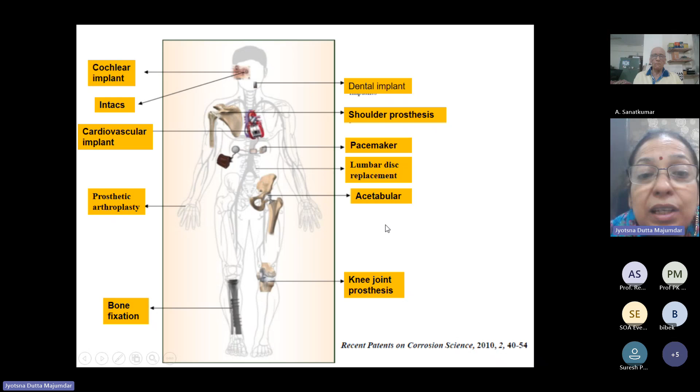Now, if you talk about the classification of bioimplants, bioimplant materials may be classified into 4 different categories: biotolerant, bioinert, bioactive, biodegradable. This is for beginners, so this is a very important and very basic classification.

Biotolerant materials are those materials which are not adverse to the human body, but whenever you implant it in the human body, there is fibrous tissue growth and they just remain like that. Bioinert materials similarly don't cause any adverse or toxicity effect on the human body, and there is cell adherence and growth with time.

Bioactive materials are important materials which basically promote cell growth and subsequently tissue growth to a very large and nice extent. Biodegradable materials are those materials which degrade within the human body, and the cell grows as it degrades, so it remains in the body but doesn't cause any toxic effect. It gradually degrades, and tissue and cell growth replaces it. So implants are basically replaced by tissues.

Magnesium is a very nice biodegradable material for implant applications. Gold is biotolerant, porous structure of hydroxyapatite is highly bioactive in nature. Similarly, plasma sprayed hydroxyapatite, zirconia is also bioinert in nature. Different metallic implants are bioinert in nature.

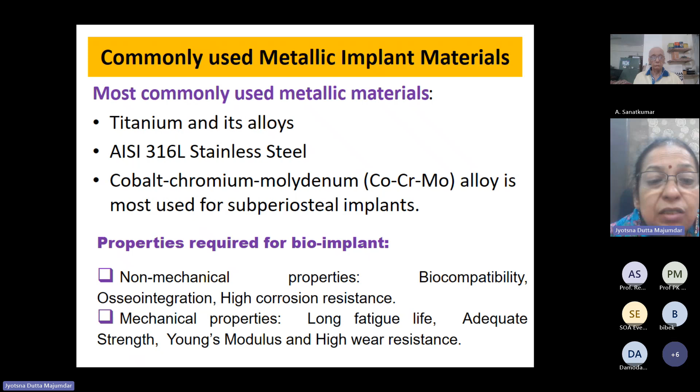The requirement for why these metallic materials are used as bioimplants is because of their biocompatibility, good osseointegration property, and comparatively higher corrosion resistance than other metallic materials available in nature. They also have good fatigue property, adequate strength, good Young's modulus, and high wear resistance property. So these are the advantages and disadvantages as stated here.

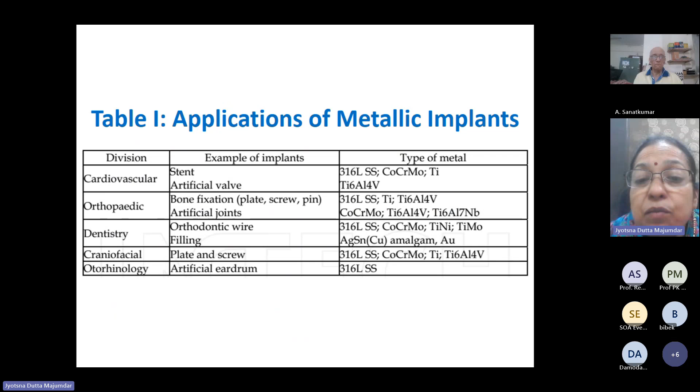Whenever you talk about applications of this metallic implant, they are mostly applied for heart tissue replacements like cardiovascular devices, and orthopedic devices like bone fixation, artificial joints, then dentistry, craniofacial plates and screws, otorhinology, artificial eardrum. So these are the different places where metallic implants are applied.

If you compare their properties, they also have gradation, in that you cannot use all metallic materials in a similar fashion as implants. If you compare 316L stainless steel to titanium, you'll see titanium is more expensive than Ti6Al4V, which is more expensive than AISI 316L stainless steel. But AISI 316L stainless steel has higher Young's modulus, and hence there is a problem of stress shielding which is not there in titanium.

Similarly, if you talk about minimization of stress shielding, your choice should be magnesium, but magnesium has a very poor corrosion resistance property. So whenever they are used in the human body, there is a lot of hydrogen evolution, so those problems are there. If you talk about corrosion resistance property, titanium is best, then 316L stainless steel, then magnesium and its alloys.

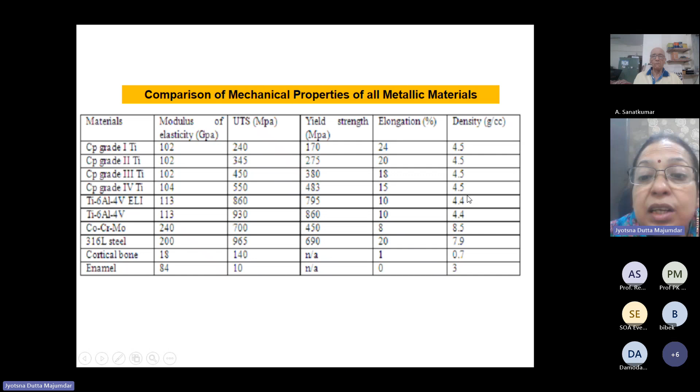But on the other hand, if you talk about strength and percentage elongation, titanium and steel are of the similar category, they perform at the same level. However, if you talk about density, it is much higher for steel and cobalt-chromium-molybdenum alloy as compared to titanium and its alloys.

These are the different applications: joint replacement parts, bone fixation materials like nails, screws, nuts, plates, housing devices for pacemakers and artificial heart valves, surgical instruments and components, dental implants, and healthcare goods like wheelchairs and artificial limbs. Earlier, artificial legs used to be fabricated from ceramic materials, but now metallic materials are coming into the market.

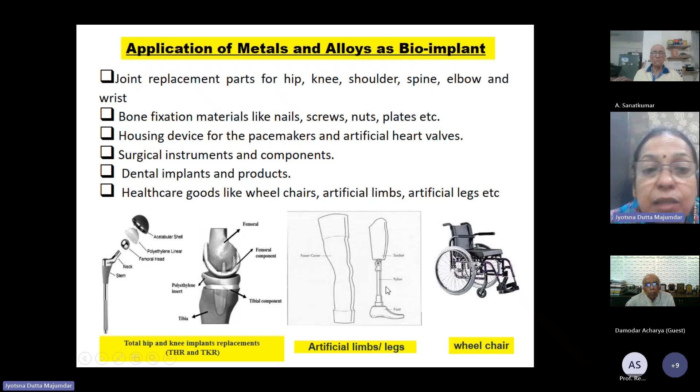For this particular application, even though it's very popular as implant material, it has been observed that metallic implants often undergo premature failure. You design the implant material for a certain period of time, but it basically fails even before its designed lifetime.

So what are the reasons? The reasons are wear, corrosion and inflammation, fibrous encapsulation, low fracture toughness, low fatigue strength, mechanical failure, and mismatch in the modulus of elasticity between the bone and implant, leading to stress shielding effect. As a result, there is shielding of stress surrounding the implant material, leading to damage of the surrounding cells, so that the cells cannot survive.

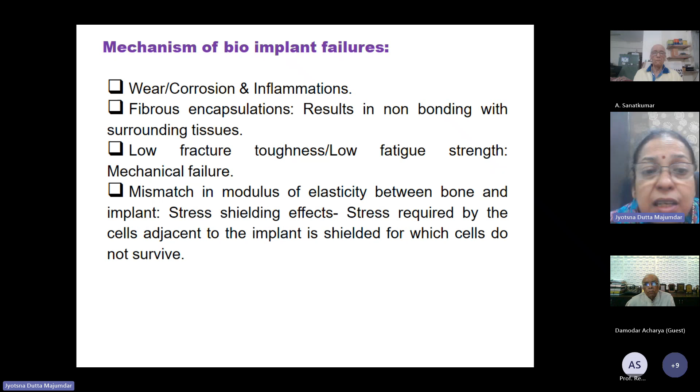Particularly, the biggest problem is film formation, biofilm formation, or biofouling corrosion, you can say. There is a very fine, thin film formation consisting of biological materials surrounding the implant material. In addition, there is typical crevice corrosion as well as tribocorrosion phenomena due to constant chewing action during processing.

You cannot keep yourself at rest after implantation. At least after 4 or 5 days you have to go on with your own activity. So if the chewing action is more, you will find there would be more problem of tribocorrosion, and there is also occlusal overload.

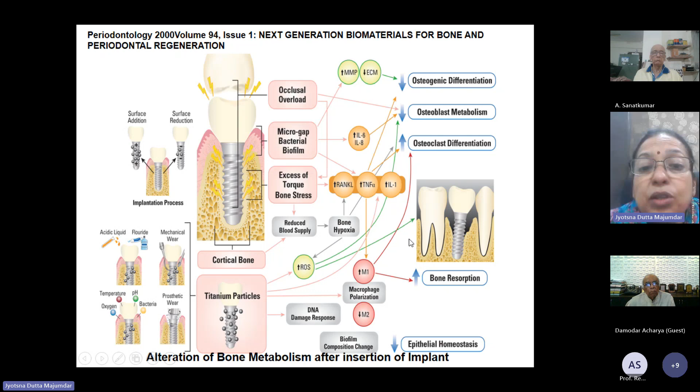Subsequently, because of this tribocorrosion and corrosion phenomena, very fine titanium particles gradually come out and spread throughout the tissues of the human body, causing inflammation and allergic reactions. These problems are always there in the human body after implantation, even after 5 to 6 years of the implant.

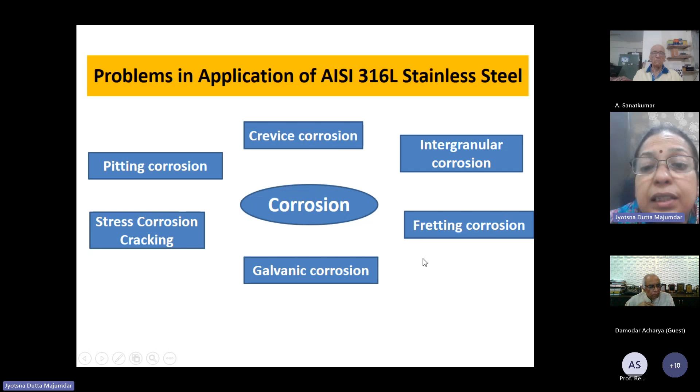Different forms of corrosion occur depending on the environment and the situation. The corrosion mode changes from one to another, and each individual mode has its own kinetics. It is very much dependent on the pH of the environment, the kind of load the implant is experiencing, and the kind of motion or movement there is. So everything plays an important role.

It is very difficult to simulate the actual situation, but it has mostly been observed that fretting corrosion is the predominant mode of corrosion, in addition to tribocorrosion in fretting mode, which causes the maximum problem associated with dental implants. But if you talk about hip and femoral prostheses and knee joints, in addition to corrosion, fatigue problem is also there, which causes degradation or premature failure of the implants.

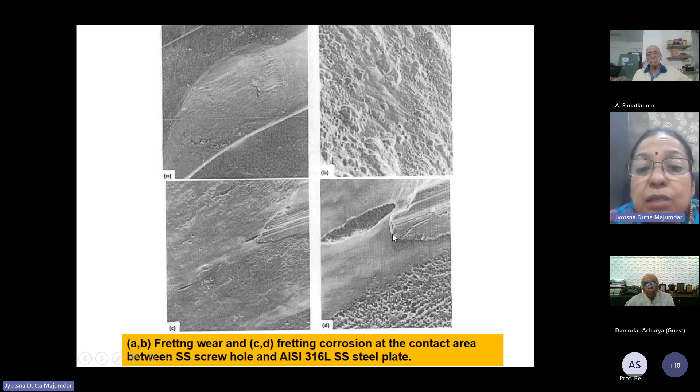This is fretting corrosion, the fretting wear and fretting corrosion at the contact area of the stainless steel screw hole and AISI 316L plate. This is the fretting wear part. Whenever there is fretting wear, there is a discontinuous removal of material from the surface, with band formation because of the loading action. If you talk about fretting corrosion, you see a similar situation but with dissolution of material from the surface, and heavy fretting corrosion as well.

So these are typical. This is also another interesting area where a lot of work needs to be conducted, because we are trying to gather information on the mechanism of failure of implants, which is not available in detail in any handbook, because of the problem of getting failed implants.

Whenever I talk to the hospital, they said whenever it fails, they basically don't consider it, they throw it away. There is no scope of keeping it, because whenever the patient reports, there is always a kind of conflict. They try to scold the patient, saying the patient didn't take extra care, that's why the implant failed. But failure might also occur because of a materials problem, and they are not so aware of the materials, because those are outsourced. They don't develop it on their own, hospital doctors have no idea about the kind of materials they are using, because they just place the order and get the implant.

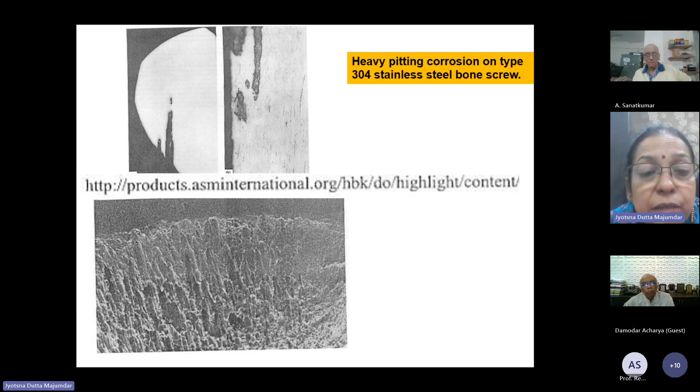So they had no idea there could be failure because of material. Now we are trying to do a small and big project in collaboration with a hospital in Bhopal, where we will try to gather failed implants and see the reasons for failure of many implants for different applications. If you look at these failures, you'll find most are because of either fatigue failure, or fretting, or combinations of fretting and corrosion, or corrosion and wear.

These are a few reasons for the premature failure of implant material. These failures may be overcome by typical designing of the surface. Another problem associated with the implant is scar formation at the interface.

Particularly when you talk about pure metal without doing any bioactive coating, if you insert it in a human body, the typical mechanism of cell or tissue growth is by mechanical anchoring. So if the surface is not properly prepared or sensitized, the cells don't grow properly, and as a result there is fibrous tissue growth on the surface, which is not good for health. At the interface between the implant and the tissue, there is cancerous cell growth, which is not really good for health in the long run.

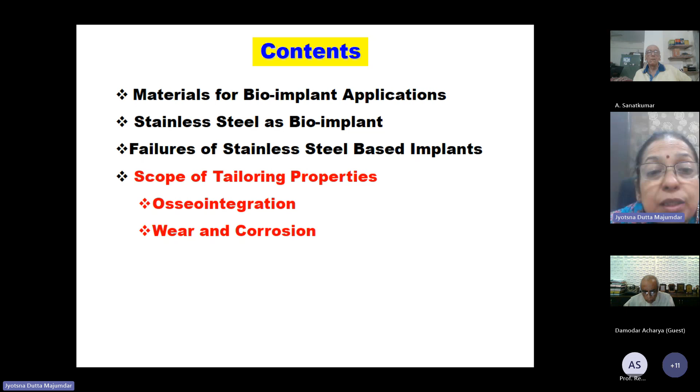The second problem we are trying to solve is the wear and corrosion problem. These are very important problems which need to be addressed. In all cases we use the typical stainless steel based implant. Initially we develop the coating, check feasibility, and optimize parameters for coating development on coupons, then check the feasibility of applying that coating on implants available in the market. This typical diagram shows that in materials processing, processing, structure and properties are very much dependent on each other, and they dictate the performance of any component.

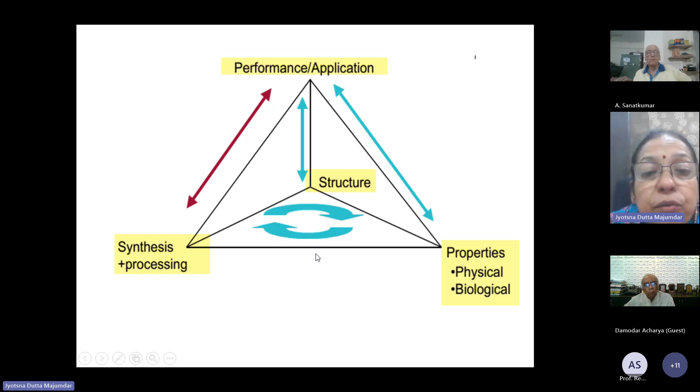Structure is influenced by the processing route followed, and subsequently the properties achieved. So structure-property correlation is a very important theme of the research of the group. We fabricate by different ways and observe the structure at different scales, and also evaluate the property. By correlating structure and property, we optimize process parameters, and under optimized parameters we try to understand the performance of the coated implant or coating.

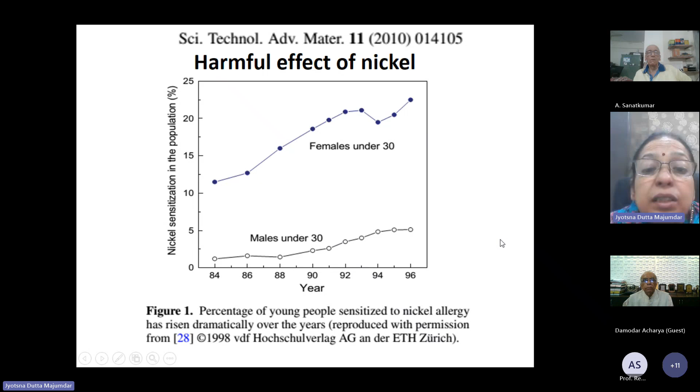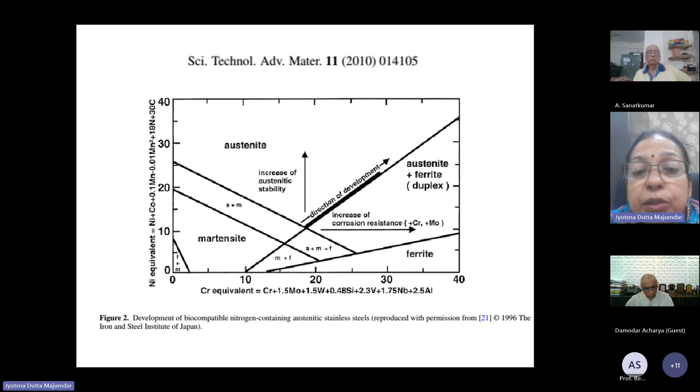So nickel equivalent is shown as a function of nitrogen, carbon, nickel, chromium, cobalt, manganese. As you increase nitrogen content, you get an effect similar to nickel, but without nickel. So you can cut the nickel content in steel, add more nitrogen, and have nitrogen-bearing steel with similar structure and properties, but free from nickel.

This is very important. There are a large number of nickel-free stainless steels coming into the market where the properties are similar, but they contain nitrogen. Nitrogen is usually purged during preparation of the steel, and during that process you can reduce the nickel content a little bit.

Some stainless steel implants for surgical applications have nitrogen content around 0.25 to 0.5, or 0.85 to 1.1%, depending on different grades. Normally in AISI 316L stainless steel there is 18% chromium, 8% nickel, and nickel content can go as high as 11 to 13%. But in nitrogen-containing steel, where nitrogen reaches up to 1 or 1.1%, you can reduce nickel content to around 0.5%. This is very good because you have much less nickel, so the probability of toxicity after implantation is minimized.

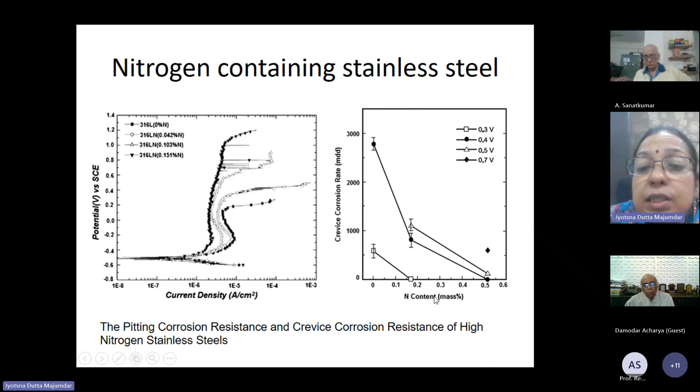So crevice corrosion property also, if you see, it is increased - that is, the crevice corrosion rate is decreased to a large extent at different voltages when you go on increasing the nitrogen content in the steel.

Similarly, if you see the abrasion corrosion, abrasive wear and tribocorrosion property, you will find that for the abrasive media in air and in sodium chloride solution, the relative wear value is significantly reduced in nitrogen containing steel.

Hardness is increased, and hardness after abrasion is also increased, and the relative wear value is significant. This steel is showing a higher value, but 316L and BIOSSN4 are having more or less similar values, or a little higher value.

I do not know, but since hardness is a little higher, it should offer higher abrasion wear as well as better tribocorrosion performance, but it's not showing so. Hardness after abrasion is increased, but the abrasive wear value is not really.

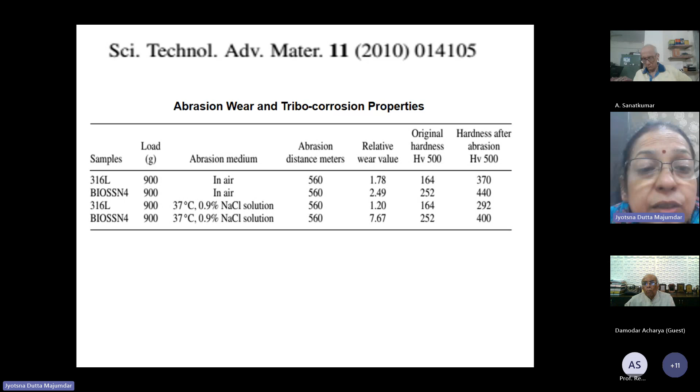So these are research results. Someone can always take the nitrogen containing steel and see the effect of this nitrogen on the tribocorrosion property in a more extensive fashion.

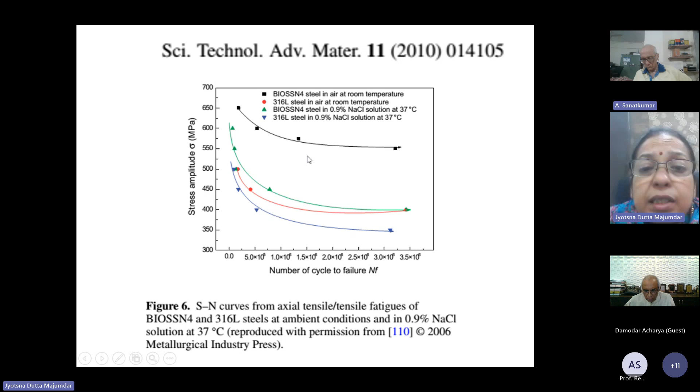If you talk about the SN curve for the nitrogen containing steel like BIOSSN4, you will find that fatigue property is also significantly higher in case of nitrogen containing steel than that without nitrogen content. So it improves fatigue corrosion resistance property to a large extent, it increases corrosion resistance to a large extent.

But as for tribocorrosion property, why it is showing a poor value, we have to - someone can repeat the result and check what is the reason behind it.

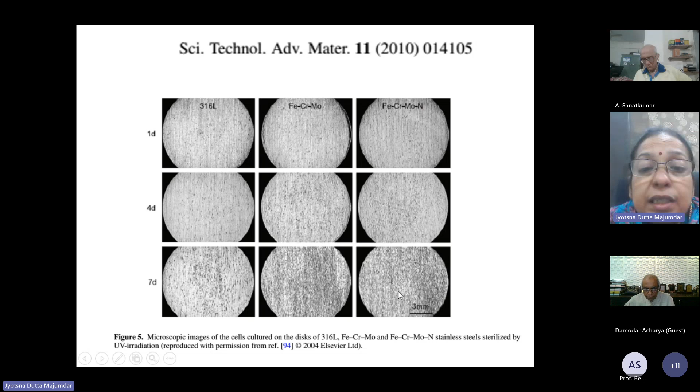So again, this is showing how the cell is growing after 7 days. It is not visible over here, but if you see the report, it is shown that for nitrogen containing steel, the cell viability and proliferation rate is higher than that of 316 stainless steel.

Now, if you talk about surface structuring and osseointegration, osseointegration can be achieved by two ways: number one is by development of bioactive coating, and number two is by roughening of the surface.

Another approach followed prior to implantation of the metallic implant is sand blasting. They do sand blasting, shot peening prior to application of the implant in the human body. When sandblasting is done, it causes a lot of rough sides on the implant surface, rough grooves on the implant surface.

When grooves are there, cells get anchored on the surface, because for all bioinert implant materials - particularly titanium based material or AISI316 stainless steel - the mechanism of cell adherence is because of mechanical anchorage, not really any spontaneous action.

So they do bioactivation of the surface by two ways: the first way is by mechanical roughening, and the second way is by application of bioactive coating.

If you talk about coating, there are so many different varieties of coating techniques available. While applying some coating material, you have to choose the proper coating technique - that's very important. So in the next few slides, I would like to show the effect of plasma spray deposition.

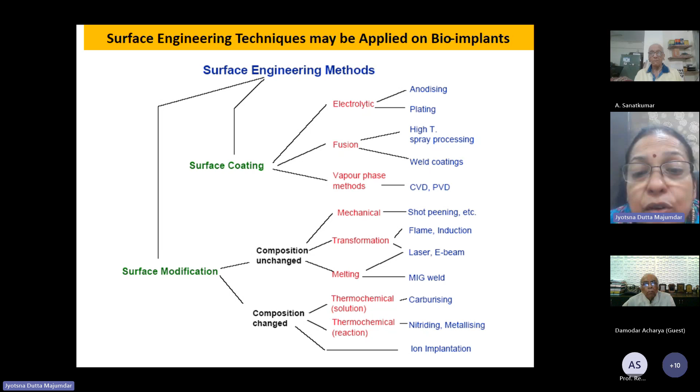Of this hydroxyapatite coating on the surface of the implant, and also we will try to show the effect of replacing sand blasting with laser surface texturing for improving the bioactivity of titanium based implant. So, as I mentioned, bioactive coating on Ti6Al4V for improved osseointegration, where we used two different types of materials.

Hydroxyapatite is a very common material, which is basically applied on the surface by dip coating or by sol-gel coating, but we used plasma spraying technique for development of hydroxyapatite - a little bit modified hydroxyapatite, because hydroxyapatite is very soft in nature.

It gets dissolved to a very large extent. Dissolution rate of hydroxyapatite within human body fluid is very high. In addition to that, the wear rate of hydroxyapatite is also very high - it is very soft in nature.

So we tried to modify the coating by addition of titanium dioxide and zirconia. Instead of pure hydroxyapatite, we developed the composite coating having 50% TiO2 and 10% ZrO2. Obviously, TiO2 and ZrO2 were reported to improve the strength, but dissolution kinetics were not reported properly.

So we developed these two coatings in addition to 100% hydroxyapatite, which was a standard, by plasma spray deposition technique. We also did heat treatment operation just for crystallization, because whenever we did plasma spraying, it was typically an amorphous coating.

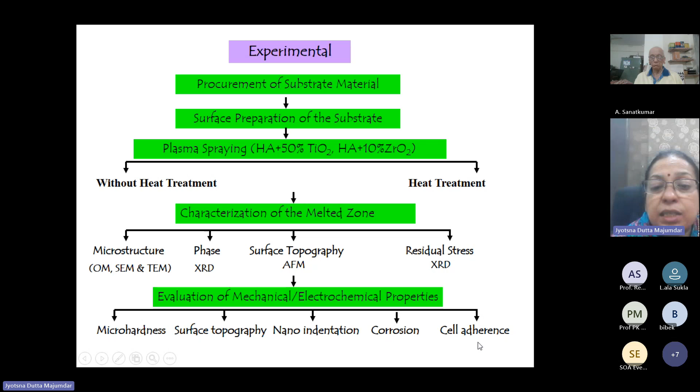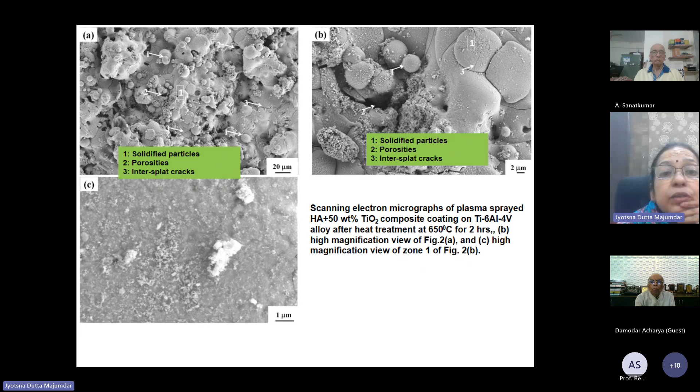This is plasma sprayed hydroxyapatite composite coating on Ti6Al4V after heat treatment. So after heat treatment we saw there was a little bit of crystallization of the coating, and we found there was also a little grain growth phenomena, and a stress relieving operation. So the coating was highly stressed before, but whenever we did the heating operation, the stress was completely relieved. That was one of the interesting features of that typical heat treatment operation.

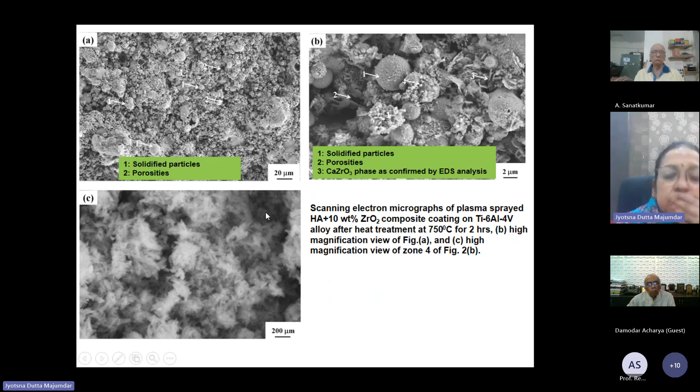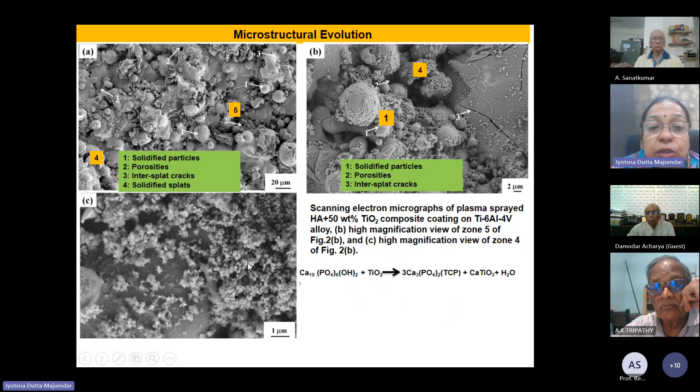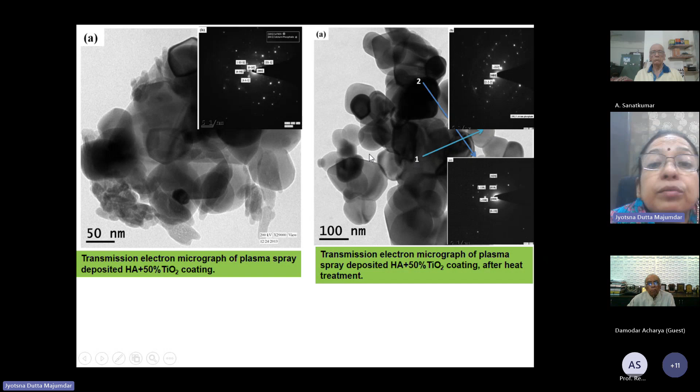This was confirmed by transmission electron microscopic observation. We see that there was presence of calcium zirconate and calcium titanate phases in the structure, which was confirmed by SAD mapping. Similarly, the calcium zirconate was also confirmed by TEM observation.

Now if you quickly go through the mechanical properties of the coating and corrosion resistance properties, you will find that due to addition of TiO2 and ZrO2 both, there was significant improvement in corrosion resistance, as well as the Young's modulus of the coating was reduced as compared to as Ti6Al4V.

But if you talk about the corrosion rate, it was again not really so high as Ti6Al4V because of higher dissolution rate of the hydroxyapatite. The pure hydroxyapatite results are not there when we compared it with pure as-received HA coating. We found that dissolution rate is decreased as compared to only HA because of the presence of TiO2 particles.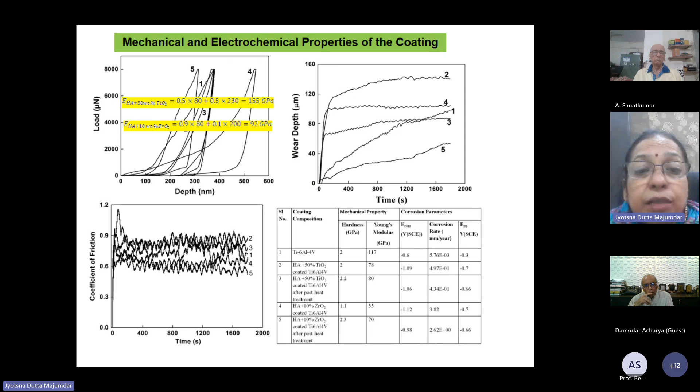So because of the hydroxyapatite coating, the corrosion rate or dissolution rate of the surface actually increases because of the higher dissolution rate of hydroxyapatite. So hydroxyapatite, though it offers bioactivity, doesn't really offer good corrosion resistance of the surface, though it is not really required because hydroxyapatite is bioactive in nature and doesn't cause any toxic effect in the human body.

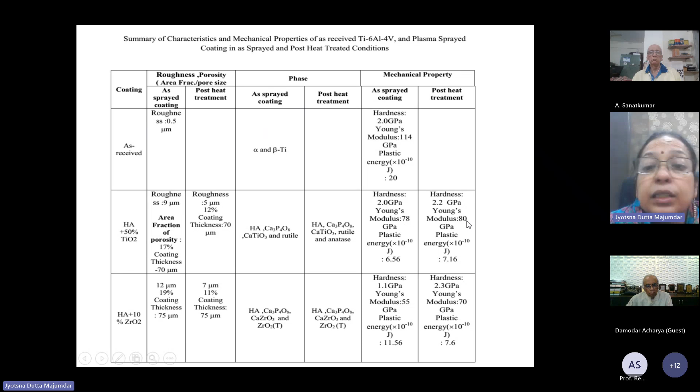So if you quickly go through the mechanical properties, we find that mechanical properties of the coating are lower than that of as-received Ti6Al4V in terms of Young's modulus and also plastic energy. But this Young's modulus reduction again is good, because on the surface the stress shielding effect is minimized.

So if you see the bioactivity behavior, we found that, being hydroxyapatite, certainly it is bioactive, and in comparison, because of addition of TiO2 and ZrO2 particles, there is not much deterioration in bioactivity. This is the surface microstructure which is shown over here.

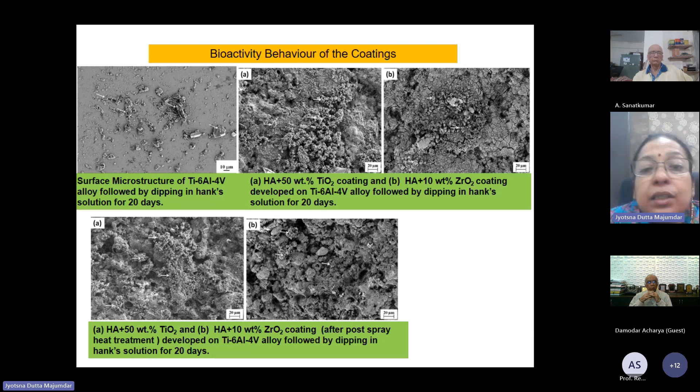But we actually determined it by weight gain, by weight change measurement. After each hour of dipping, we found the amount of weight change as a function of original weight. So partly there is weight loss because of dissolution, and weight gain is because of deposition.

So what we found is that the area fraction of deposition after dipping is 22% for Ti6Al4V. However, due to hydroxyapatite coating, it is 55%, and after heat treatment, there is a little bit reduction in the area fraction of apatite formation. So there is a little bit reduction in bioactivity, but these are all experimental results.

Bioactivity is a crude way of measuring the bioperformance of the material, so we have to go for in vivo analysis to know how it is anchored to the tissue, hard bone actually.

So now we also try to improve the osseointegration property by surface texturing. Usually, as I mentioned, people apply sand blasting, but whenever sand blasting is applied, there is random roughness on the surface, and that random roughness causes cell growth in a random fashion. So we try to observe the effect of periodic structuring or periodic roughening on the surface, and its effect on cell attachment.

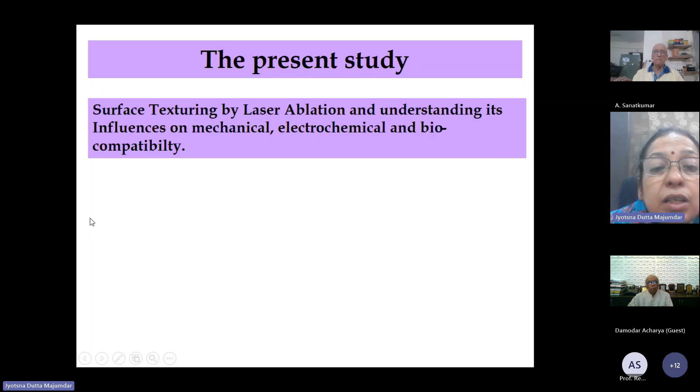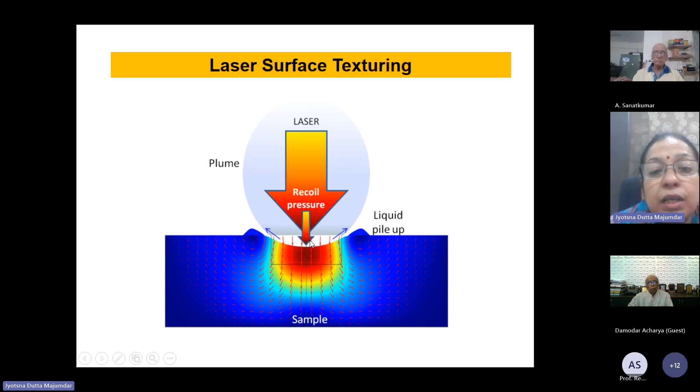So we use laser ablation technique. This process is called laser surface texturing to cause periodic structuring, where a high power nanosecond laser was employed on the surface to ablate the material, and subsequently rastered on the surface to cause texturing. We tried to develop two different types of texture: one is linear texture, another is circular texture.

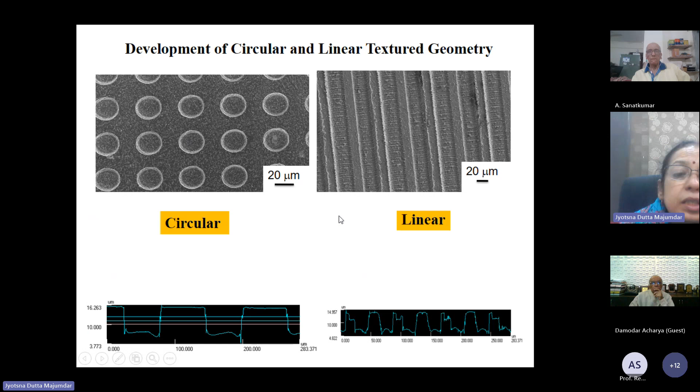In one kind of texture, we remove the material in a spot-by-spot fashion with a diameter of each groove of 20 microns. In the other case, it's in a linear fashion. In both cases we covered almost 50% of the area which was textured, and 50% was untextured. So this is a typical parameter.

We also changed the environment. In one case we used argon, in another oxygen, along with laser treatment, and in the third case nitrogen. Our standard was a sand blasted sample, which was done in order to understand the effect of periodic texturing or its added advantage over sand blasting.

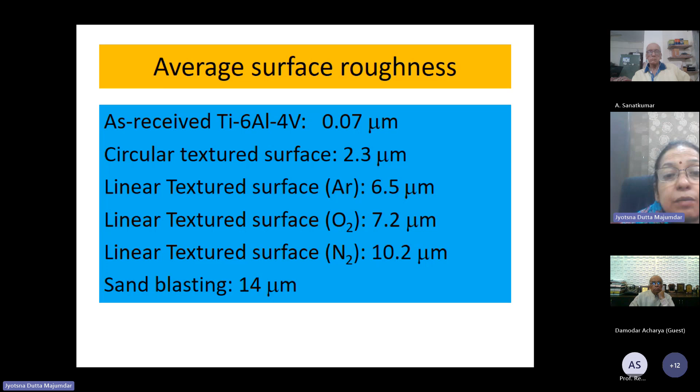Because titanium, as such, whenever it is implanted, there is spontaneous oxide formation on the surface. But that spontaneous oxide which forms on the surface is very loose and porous, so as a result it doesn't perform the way it should. So in order to improve the performance further, people use different surface oxidation techniques like anodization or surface high temperature oxidation processing.

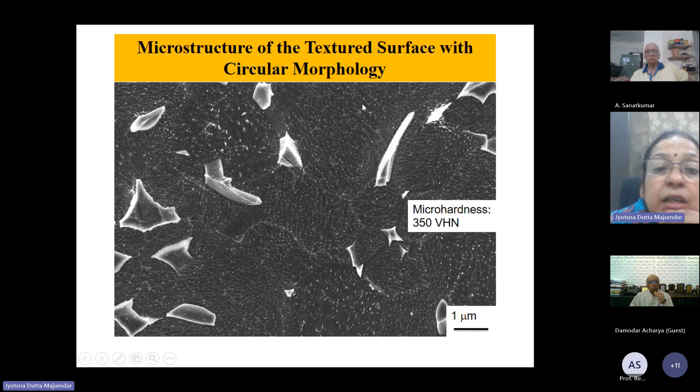So here while processing we had grain refinement as well as very fine oxide particle dispersion all throughout the surface. These are all beta phases. There was redistribution of the beta phases as such—during in the as-received Ti6Al4V, beta phases are present along grain boundaries, but when we melted it there was vanadium redistribution, so the beta phase was discontinuously present all throughout the surface.

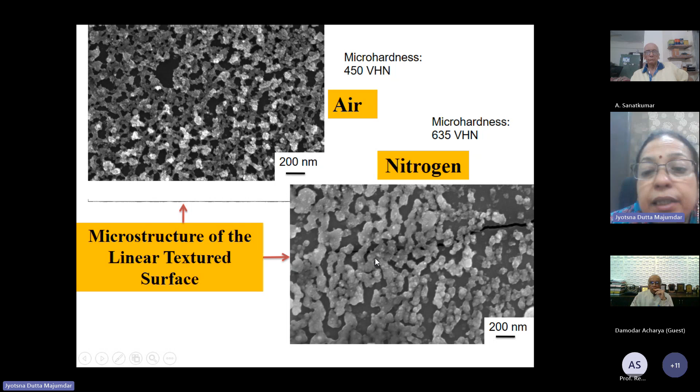When we melted in air and nitrogen environment, we found that oxide formation is there, but the surface is again partly oxides, partly metals, so oxide networks are there. Similarly, in the nitrogen environment when we melted, we had titanium nitride networks, and in addition to that, there is titanium alpha.

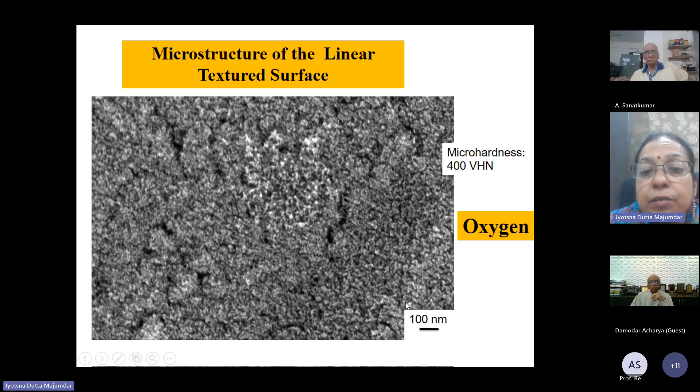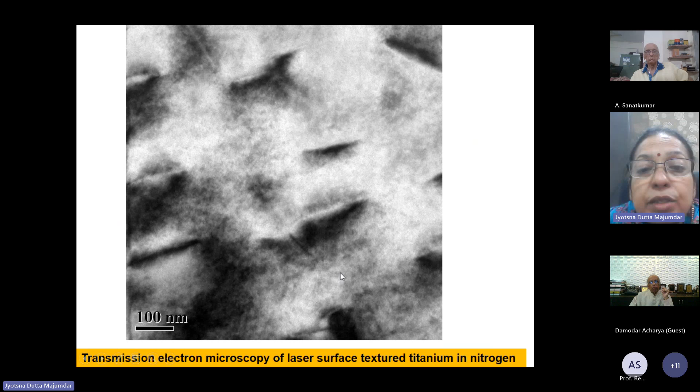In the linear textured surface, as I said, in the oxygen environment there was a very thin oxide film on the surface. We did this in three different environments: air, oxygen and nitrogen. Here we find patches of oxides present, in the form of very fine dots and precipitates, and in the nitrogen environment nitrides are also present all throughout the surface. In the oxygen environment we find a lot of oxides on the surface.

These are confirmed by TEM analysis, and we further reconfirmed the presence of these oxides by electron backscatter diffraction spectroscopy. This is typical phase mapping using EBSD analysis, where we show the presence of beta and alpha in the linear textured argon surface, in argon environment. If you see carefully you will find this is mostly alpha. Some amount of rutile is also present, oxides are also there, and Ti6O, another oxide phase, is present in a very small amount, and beta is present in a discontinuous fashion.

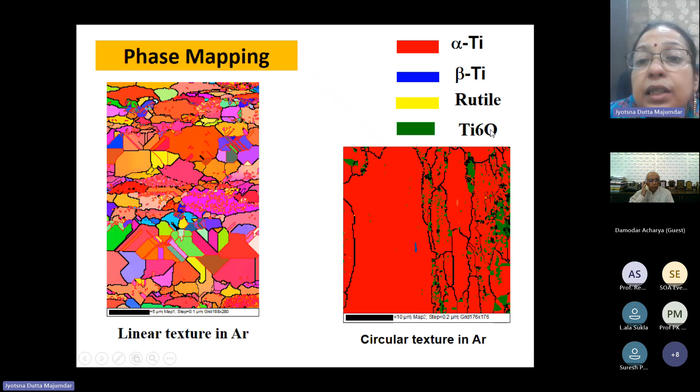A circular texture surface again. This is the texture surface we find when we look at the cross section. Here you see rutiles are very less, but this is mostly alpha and Ti6O phase formation. So phase stoichiometry varied with different samples. In argon and oxygen environment we see a lot of beta phase, mostly alpha, and some oxides are also there.

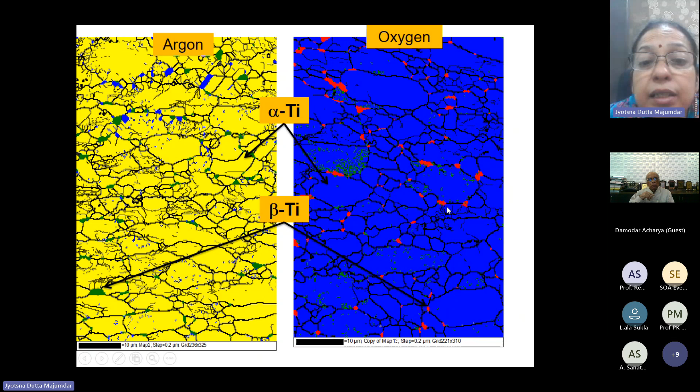Red particles are very small oxides present on the surface. In nitrogen environment there are a lot of nitrides, and alpha phase is also there.

So these are again a little bit of EBSD. We try to map the phase, but this is a relative measurement technique. We try to see, but it had to be confirmed by XRD analysis to know whether these phases are actually present.

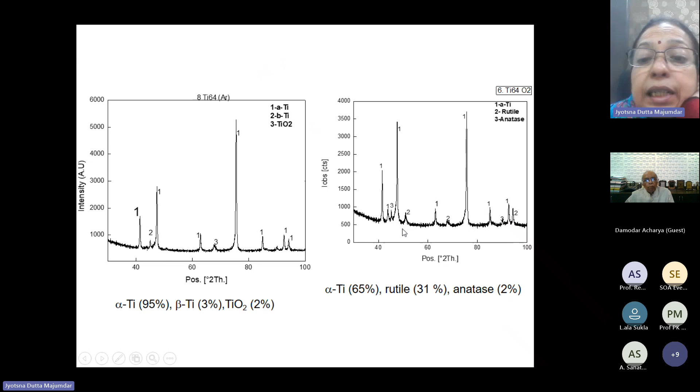When we did XRD analysis, we found that in the argon containing environment and oxygen containing environment, there are a lot of oxides on the surface. In nitrogen containing environment there are nitrides again. These are all typical analysis research results.

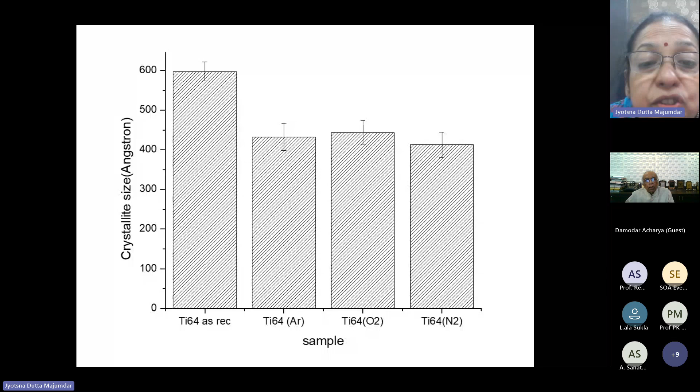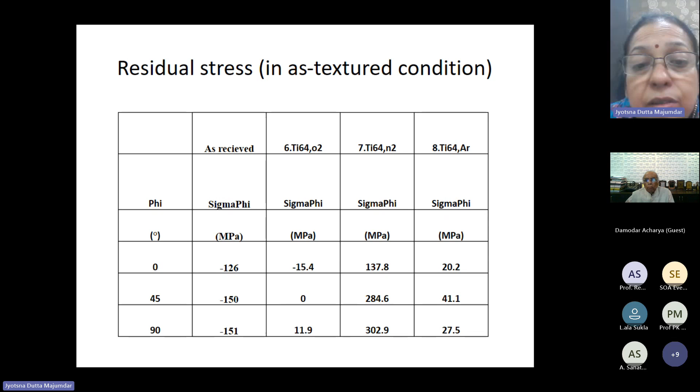But what is important here is that there was residual stress in the textured condition. There was also residual stress, but it was not significant, much lower than the acceptable limit. Whatever residual stress we observed was because these were irradiated using nanosecond laser, a very low pulse nanosecond laser, so it didn't cause any high residual stress to be introduced on the surface.

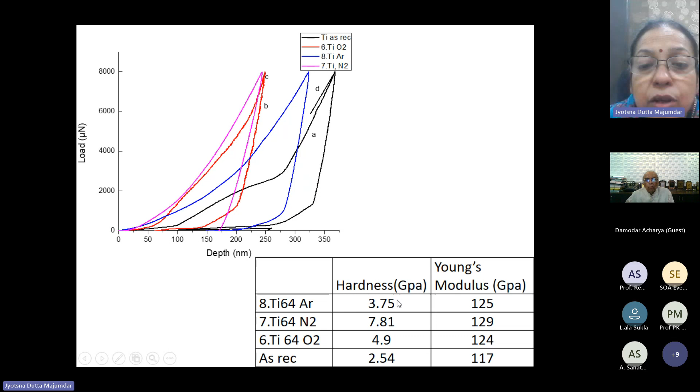The Young's modulus was significantly a little bit higher than the as-received surface because of presence of oxides, nitrides, and dissolved phases, and hardness was also improved to a large extent because of oxide and nitride phases on the surface. Due to these things, there is improvement of wear resistance property.

These are dry wear results, but this is not what we currently focus on. These are results which we observed long back. These days we are not doing any dry wear study.

We are trying to understand the performance of the coated material by tribocorrosion, where we are doing the same fretting wear in presence of the Hank's solution. We are getting more or less a similar trend to what we get in dry wear observed in wet wear as well. But obviously there is a corrosion effect also combined in wear, so that's very good information on how the materials behave in a real environment.

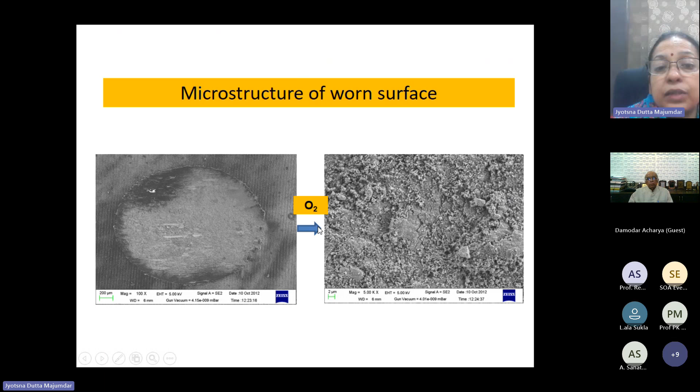We find that in nitrogen environment the wear volume is lower than that of the argon environment textured samples. If you see the microstructure of the worn surface, you see the typical characteristics of fretting wear observed here.

Interestingly, if we look at the corrosion rate due to texturing, it was observed that corrosion rate was significantly reduced on the textured surface, too much reduction in corrosion rate. But this reduction obviously is not only for the textured surface, since this corrosion study was done on a surface with a combination of both textured and non-textured regions, so possibly area corrections were not done.

Whatever average area we took, surface area in corrosion is very important, so area calculation is very important. But we just did the average area calculation, not the actual area, which is much higher than the average area whenever you do texturing. So whatever corrosion rate is observed is actually a kind of composite area. The first error is because this is not truly the textured surface's wear or corrosion value.

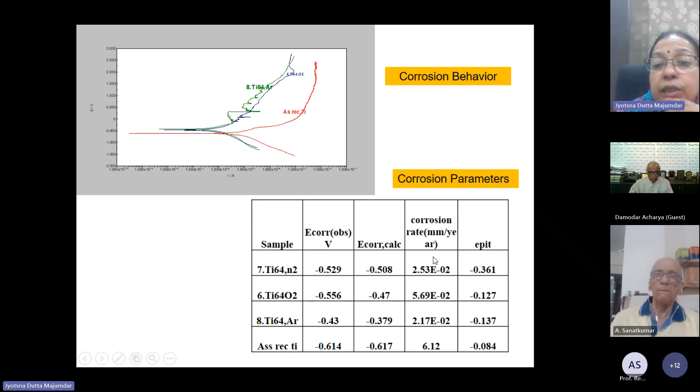This is a combination of textured and non-textured surface. The second problem is that while calculating the area, we just calculated the average area but not the actual area because of the presence of texturing. So these two corrections have to be made, then a little calculation done, to find out the true wear and corrosion rate of the textured surface.

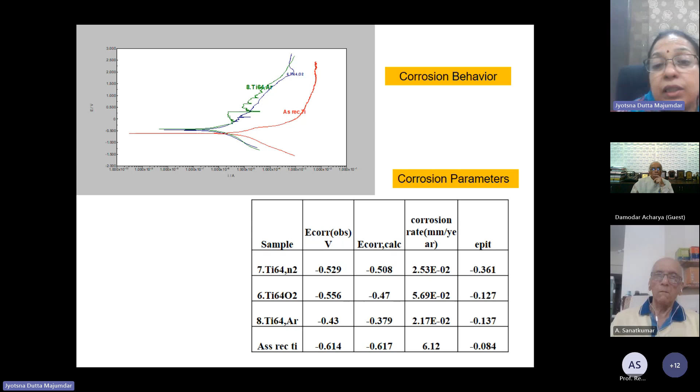But in the actual situation it's of no use, because you will see whatever is shown here only, since it's a combination of texture and non-texture. 100% texturing cannot be done here, because then it is no more texturing, it is an ablated surface.

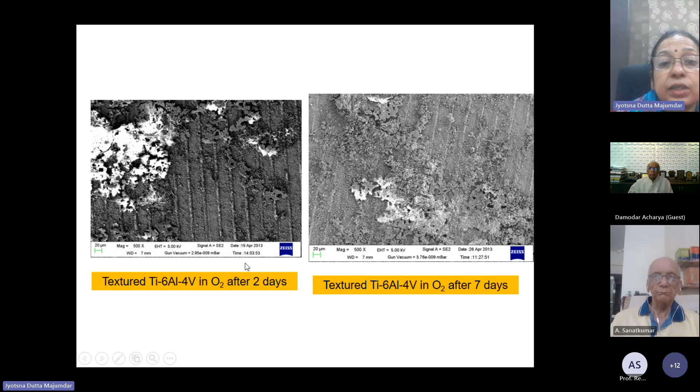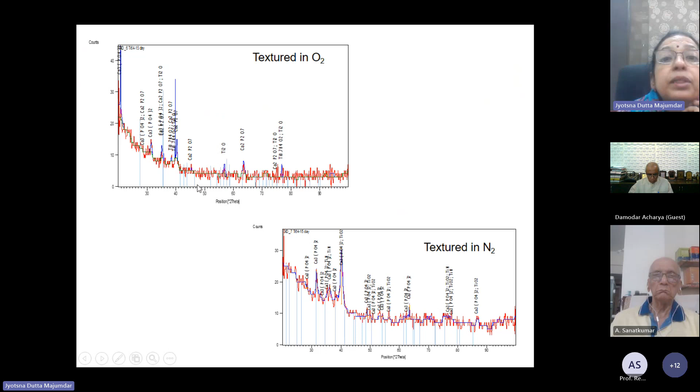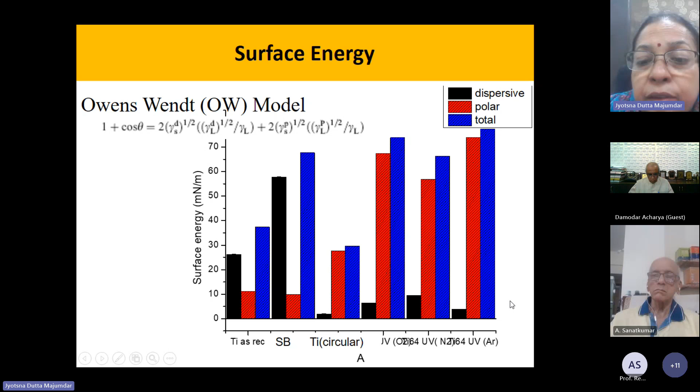It was random, it was uniform all throughout. But when we compared it with sandblasted samples, we saw that though people use sandblasting, it was not really very strong and uniform, and the percentage of cell adhered was also much lower than that of the textured samples.

When we did texturing, we found that nitrogen textured samples offered maximum adhesion of the cell, and cell attachment was parallel to the textured surface. So wherever there was texturing, adhesion was maximum.

In the circular texture sample, what we found was that inside the circle or groove, there was not much attachment of the cell.

When we measured the proliferation rate, we found that the nitrogen atmosphere offered maximum cell growth rate as compared to even sandblasted and as-received samples. The circular groove sample didn't show much promising result.

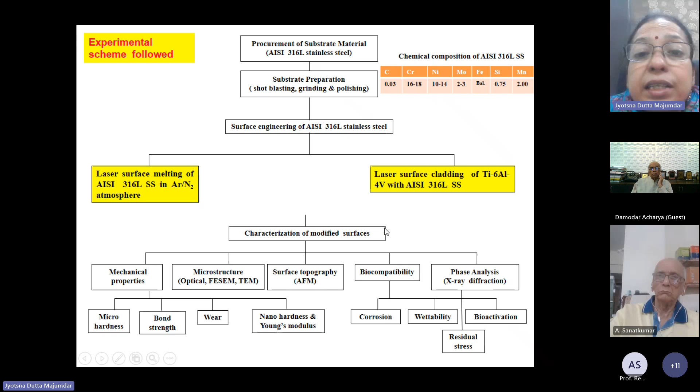One interesting observation on laser surface processing is that you get very good results only when you do processing under a very narrow processing regime. Narrow processing regime means narrow laser power and scan speed combinations. People often ask why didn't you choose higher power and lower scan speed.

These are all other parameters. But in all cases, we find that even though you use thousands of parameters, you get the best result only under a few, only a very narrow power scan speed combination regime. It's not power, rather power density - narrow energy density regime, you should say.

So here we did argon and nitrogen as environment and did the processing. Excuse me, I got a cold because the last few days I was traveling and somehow got an infection.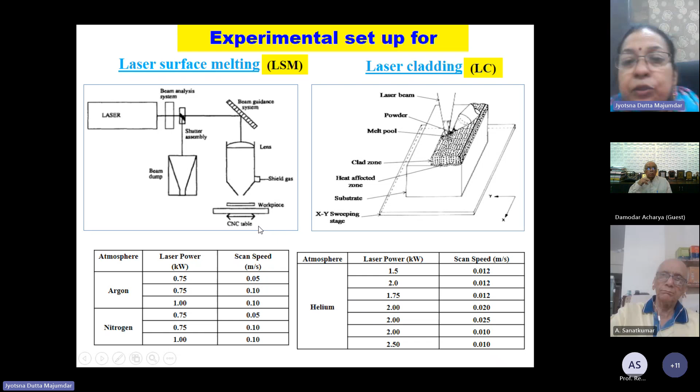So argon was - it's okay, sir, madam, no problem. The power range was from 0.75 to 1 kilowatt and scan speed was 0.05 to 0.1, and the beam diameter was 2.5 to 3 millimeters.

So I'll show the results of surface melting of 316L stainless steel. We find that after surface melting, you see a lot of refinement of the microstructure. This is in argon environment, and this is for nitrogen environment.

So this is argon environment, and these are nitrogen environment. We find that in nitrogen environment there are formation of very fine nitrides of Fe2N and also chromium nitride.

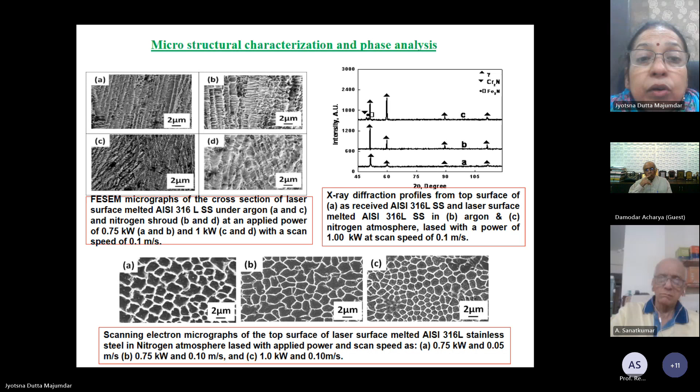This is interesting in case of this concept, surface melting. Laser processing is so unique that you can do anything using this laser on the surface. We saw very interesting results on surface melting. Whenever you do surface melting of an alloy system, you just introduce refined microstructure.

In addition to that, you go on redistribution of the alloying element in such a fashion that there is homogenization of alloying elements all throughout the microstructure, which is not there in as-cast and rolled product. So this homogenization and refinement combiningly introduce a lot of improvement of different properties, particularly corrosion resistance property.

This philosophy we applied in many alloy systems, and we got similar results. So it's a very easy technique. You are simply melting it, and in one case you are melting in argon. When you use argon, naturally there is refinement of microstructure, and that rate of refinement depends on the argon flow rate as well.

As you go on increasing the flow rate, your convective dominated heat flow also increases, so cooling rate increases, and as a result degree of refinement also increases. But when you use nitrogen as environment, there also you introduce a lot of nitrides in the structure.

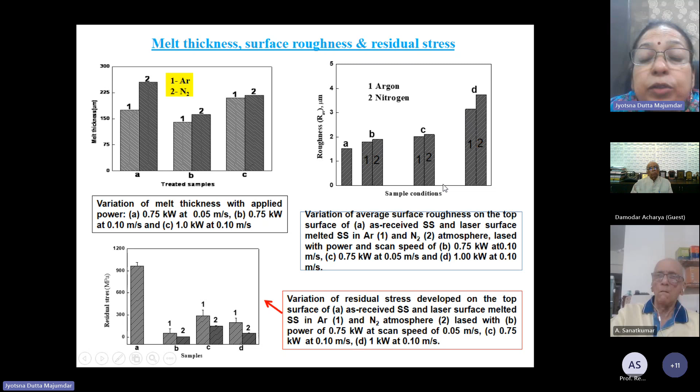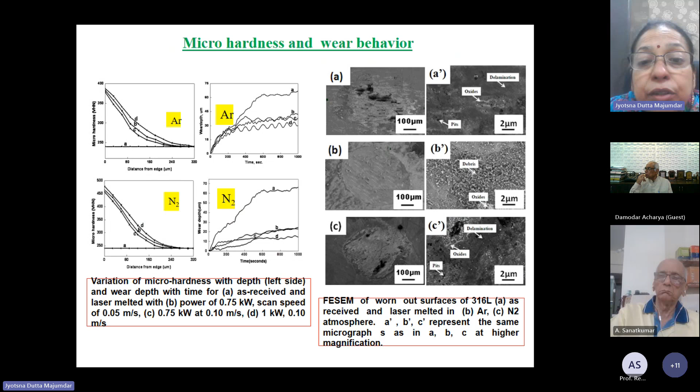And the mechanism in all the cases - what we do is that we don't stop at just observation of the kinetics. We also try to understand the mechanism, and give a little schematic on what's happening inside at the contact zone in a manipulated fashion.

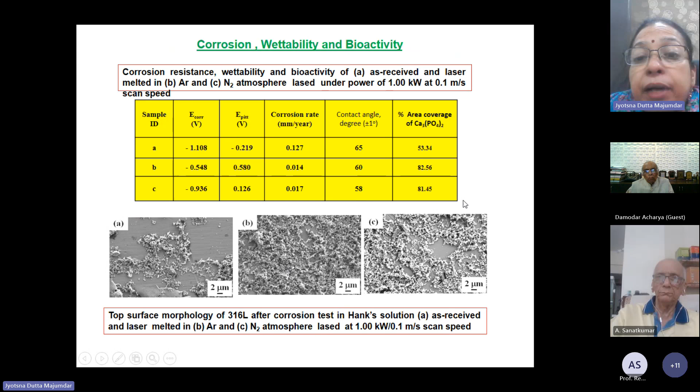In addition, the overall corrosion rate - if you see the contact angle, it doesn't change much, though it is lower than that of the as-received substrate. So the surface is wettable, wettability increases. But more interestingly, bioactivity increases to a large extent as compared to that of as-received material.

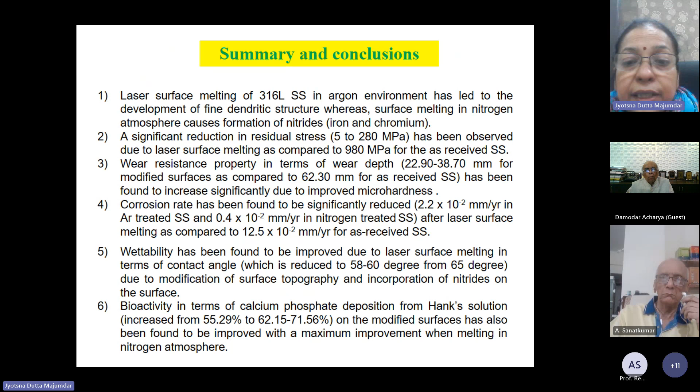So these are the interesting findings. A similar philosophy was also followed in Ti6Al4V, where we got significant improvement in wear resistance, corrosion resistance, and bioactivity. Those results I'm not going to show here.

Another interesting observation is laser surface cladding of titanium on 316L stainless steel. AISI 316L stainless steel is much cheaper than Ti6Al4V or any titanium based alloy, but the problem is nickel leaching and higher corrosion rate.

In addition, there's stress shielding effect. Obviously stress shielding is the core effect which you cannot avoid by surface processing. But if you develop a very thick clad layer of titanium on AISI 316L stainless steel, then corrosion problem can be addressed to a large extent.

So with this concept, we basically cladded titanium on AISI 316L stainless steel. But one of the biggest problems of cladding was the formation of iron titanium intermetallics, Fe2Ti, Fe3Ti. These intermetallics are of major concern because they can cause problems when the component is subjected to fluctuating loading, particularly in fretting or fatigue wear.

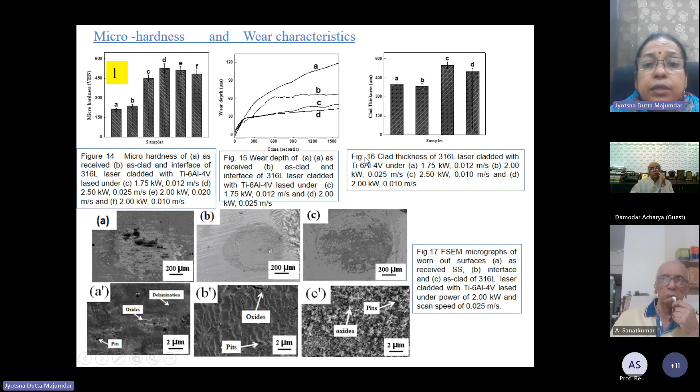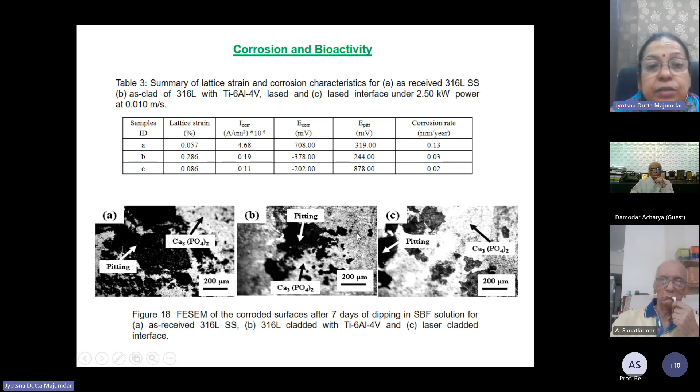Some of the observations: the clad layer was alpha prime titanium and quenched—this alpha prime is always present when we melt Ti6Al4V using a laser beam because of very fast cooling. The interface consists of fine equiaxed grains of alpha, and in addition there's presence of FeTi phase. Wear resistance properties are significantly improved, corrosion resistance is also improved, and bioactivity is increased from 33.34% for as-received to 81%.

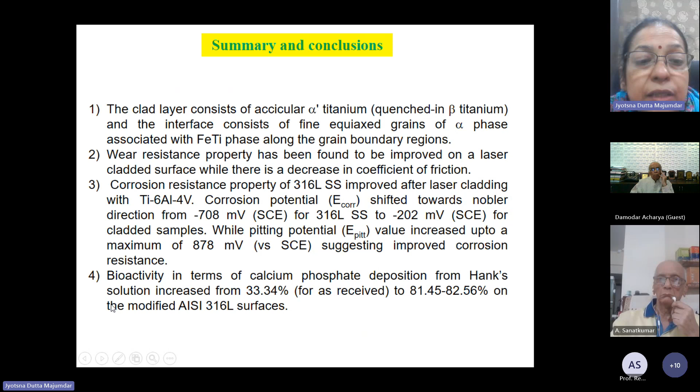This is also a very interesting way of designing the implant by combining two materials—the core is cheap and formable, and since AISI 316 stainless steel is highly formable, weldable, and cheaper than Ti6Al4V, having a Ti6Al4V surface with AISI 316 stainless steel core gives a very good economic way of having good implant materials.

So finally, it is very important that you design the surface carefully for mitigation or improvement of the properties you're looking for, and you can use any approach, but you have to consider cost as well as environmental impact of the processing. For example, you can use chemical route, thermal route, or laser processing route, but you have to check which one gives minimum environmental impact, or which is greener, and budget is also a major concern.

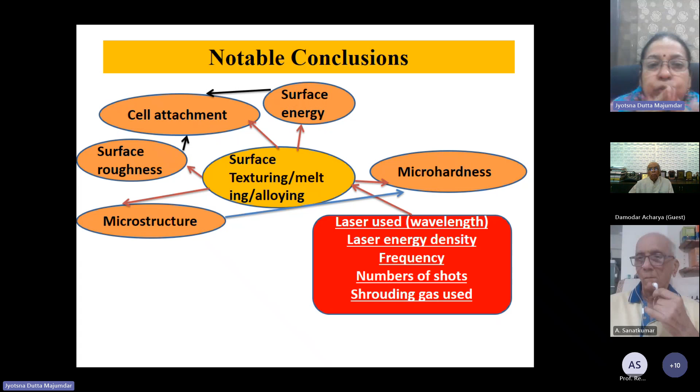Finally, it is very important that implant design should be made in a tailored fashion, and the same modification cannot be applied throughout. It should be a functionally graded implant so that you get different properties as needed.

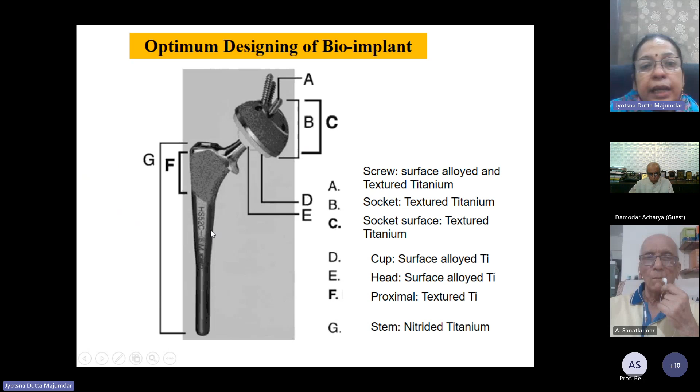You apply different processes in different zones. This is typical optimum bio-designing of an implant, where here you can use surface texturing, here again you can use surface texturing, and here there is no need. So you have to design the implant in a very methodical and wise way.

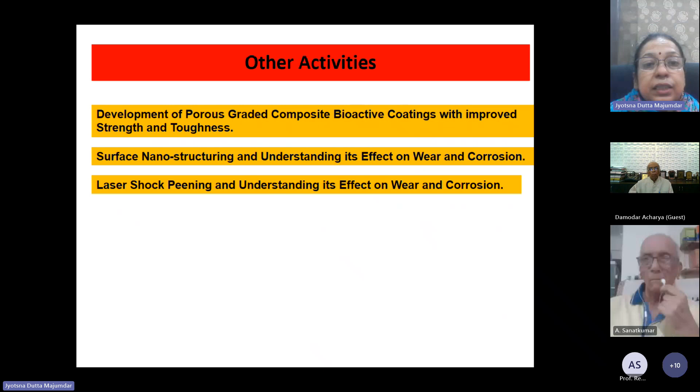Other things we are doing in the group are developing porous graded composite and porous titanium for bioimplant applications, and we are doing surface nanostructuring, shock peening. We had recently some good work on shock peening as well as a combination of structuring and surface compositing. So those are the things we are doing for improving the overall performance of the implant material in terms of mechanical, mechanochemical, and corrosion properties.